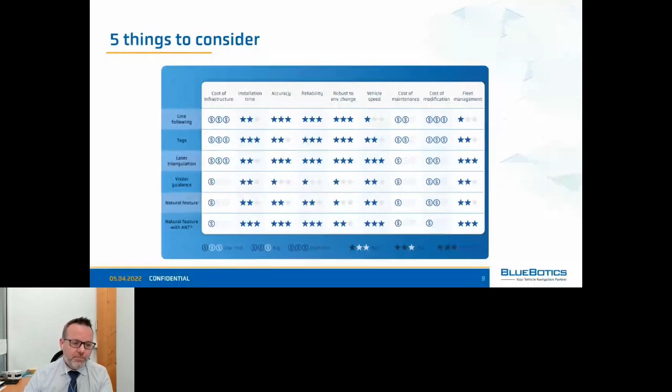Third point, if you decide you want to move from manual forklifts or manual vehicles to automated vehicles, the question is, does your staff have the skills to do this job? Because as I just said, it's not the same producing and selling manual vehicles compared to producing, selling and commissioning automated vehicles. So it's very important to find out if the team dealing with the automated forklifts or automated vehicles has the right skills, the right education, the right experience to deal with this new kind of product.

And point number 4, we should not forget about the battery and charging approach used in a vehicle, because it has a very important impact. Especially in the last years, where we moved from lead batteries to lithium batteries, the ratio between the operation of a vehicle and the time spent charging has dramatically changed. So by choosing the right battery system, and the right charging system, which of course you can discuss with all our partner companies in the group.

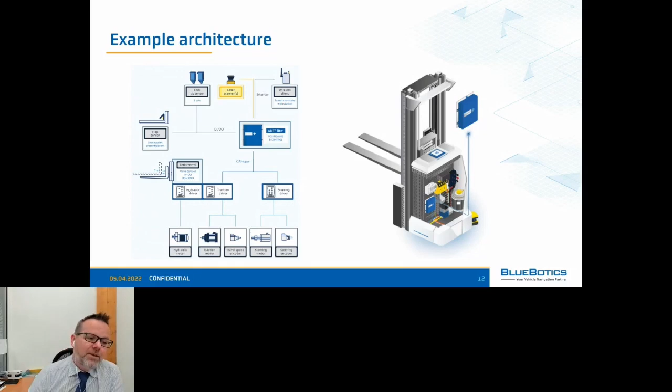This was the part about how to automate. Then we also bring you 3 questions that are common for someone doing automated guided vehicles, automated forklifts or autonomous mobile robots. So point number 1, a question that comes very often is, what do I need if I have more than one vehicle which is automated?

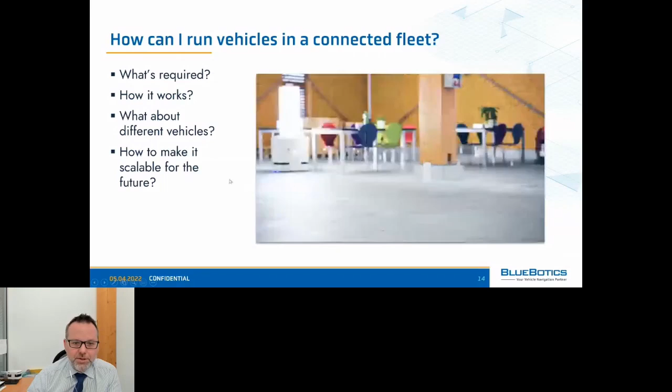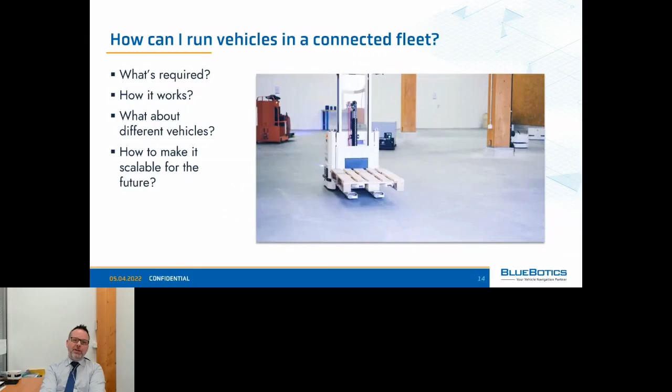So in this case, we talk about a fleet management system. So basically what is required for that, I may just run the video here. It's a little bit bumpy, but it seems it works. So what is required? First of all, if you have more than one vehicle, the vehicles are sharing the different, let's call them streets or ways. So one needs to have a traffic management system that allows to know which vehicle can go and which vehicle has to stop when there is traffic in a certain place.

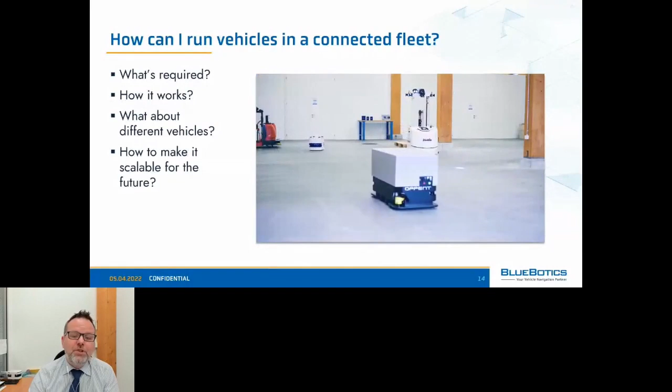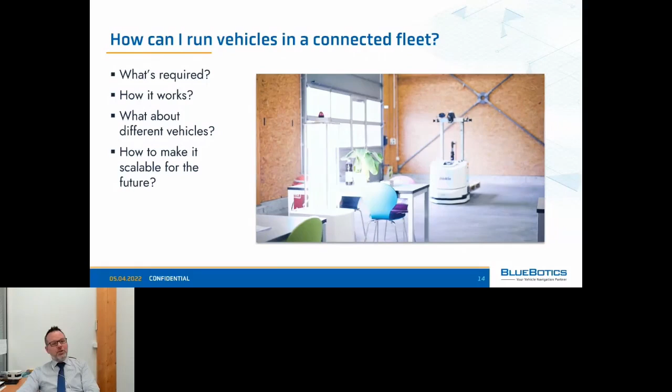A second point, which is fundamental, is that if there is a fleet of vehicles, one should define which vehicle should do which task. So this we call scheduling. These are the 2 most important functionalities that one has in a fleet management system. So I just repeat, on one side is scheduling, which means that one has to decide which job has to be given to which vehicle and when. And the second one is to then coordinate all these vehicles moving around by having a traffic management system.

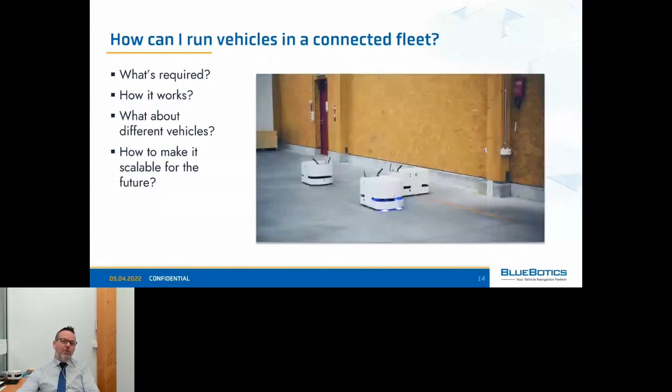How does it work? Well, the idea is rather simple. In this case, it is to have a centralized system that is talking regularly with all these vehicles and knows what the vehicles plan to do, where they plan to go. And with this in mind, the system can then coordinate the different jobs that have to be done and the different routes that the vehicles are traveling.

There is also an emerging question. There are more and more end customers that say most of the time they need more than one vehicle. They need different vehicle types. They may need vehicles to move pallets, but also vehicles to move boxes or cars, etc. So in this case, there is a need that is coming up, which is having different vehicle types or even different vehicle brands working together. And that's a key requirement from the market. There are very few suppliers that can solve this problem. It's rather difficult to have this.

There are installations, for example, at Volkswagen, where you have 3 different vehicle types and 3 different streets, because every vehicle needs its own, because they are not able with the different fleet management systems to share the same space. And of course, this is not ideal in terms of cost of the square meter and cost of the fleet management itself, because you have to install 3 different systems. And that's where we think we can make a difference in the future, because with our system, we can make different types of vehicles and different brands work together.

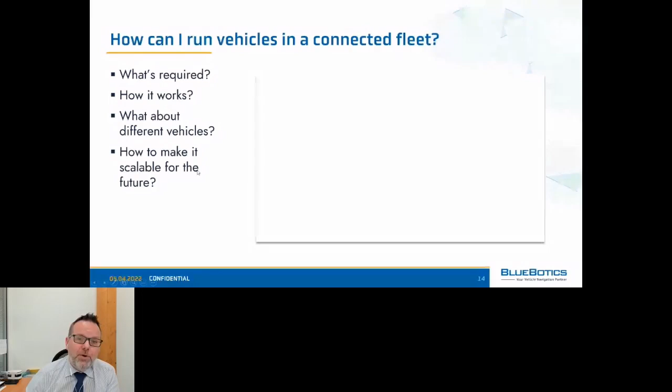A second point that, to be honest, we also underestimated at BlueBotics in the beginning, kind of 10 years ago, is that the vehicles, in order to do their job, need interfaces. On one side to the supervision team that has to know how the system is performing, if there is something to do, if there is maintenance, etc. That's something that is

relatively clear. But the other point is that it's important to have an interface to the business software, as I said before, which could be a warehouse management system, manufacturing execution system, or an ERP. That's what we see here. And there are in reality exceptions. There are systems that are installed that only have this part here because they are only doing very simple tasks that are started by a button or by a simple interface.

But I would say that the most typical installations are really installations where the whole system is integrated to the business software. And basically, an automated vehicle is a kind of arm of the business software that can not only track what's going on, but really start moving things around, like moving pallets, moving goods, semi-assemblies, etc. That's one part of the story, which is very important.

In our case, we have a very clear and simple API, so application programming interface, which is standardized and allows to build up this link between the fleet management that we call ANT server and the business software in a rather simple way. The second point that is very important is that it is quite seldom that a vehicle can work by itself without interacting with anything else in the physical world.

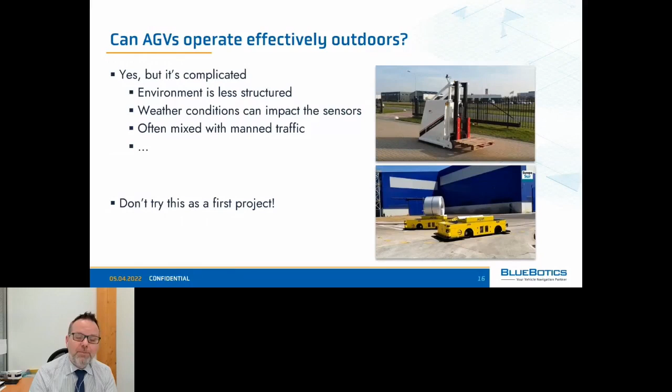Here, I may have a question for Lloyd, because this would be all the part about the technology, why to automate, etc. And now we have examples of customer projects. So should we open the session for questions at this stage, and then go to the examples and open it again later on? Sure. I mean, it's your choice. That can work. No, you are the boss. Okay. We don't have any questions yet coming up in the chat. So maybe go through the projects, and then we can pause in a few minutes. Sure, let's do that then. And then your job, audience, is to invent questions later for the end of the presentation.

Okay, so the idea here is that we would like to share a few projects that we think are relevant with you to give you a better idea of what is an application with automated guided vehicles, automated forklifts, etc. So we start with project number one, which is an automation of production of parts for automotive. This is a project that has been done by our customer F3 Design in the USA. The end customer, so the company automating their processes, is GECOM Corporation USA. As I said before, they are in the automotive market.

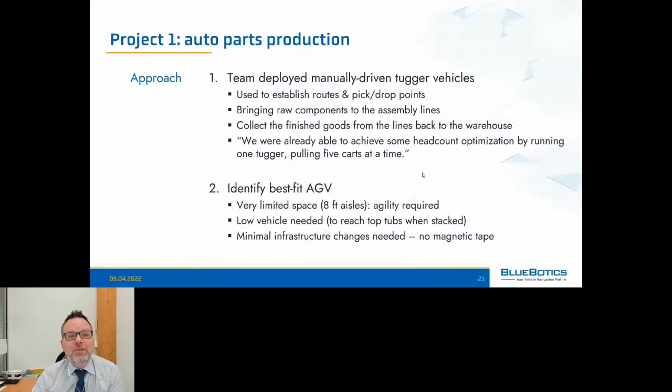In general, also, since it is a building that was already there and an operation that was already working, they wanted to have minimal infrastructure changes in order to use automated guided vehicles. And these 3 different constraints are the main reason for them to choose the F3 Design Nipper vehicle, which is a very compact vehicle. It can move up to 1 ton. And another fundamental point is a vehicle that can turn on the spot.

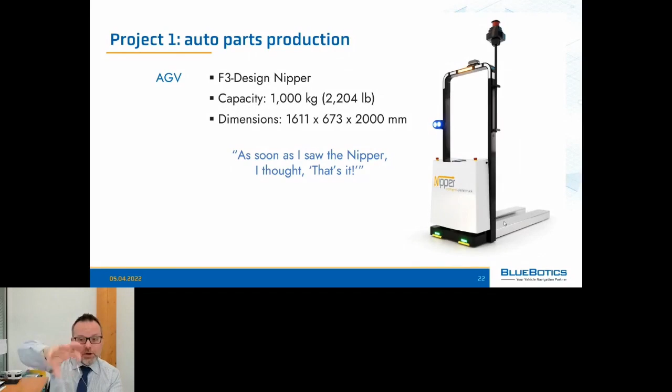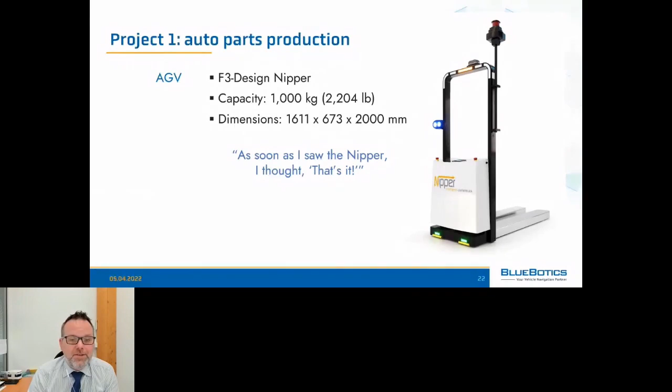So it's a differential drive system. It has basically 2 motors there, and they can really turn on the spot to take as little space as possible. And so the statement of the CEO of the company was that as soon as they saw this vehicle, they said, "Oh, that's clear. That's what we need for this application." In terms of software, as I said quickly before, the BlueBotics ANT server was interfaced with the Ignition SCADA software. They also developed custom-specific interfaces to monitor the operation of the vehicles.

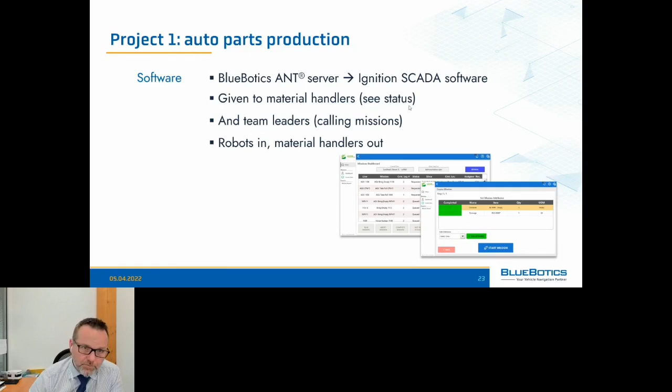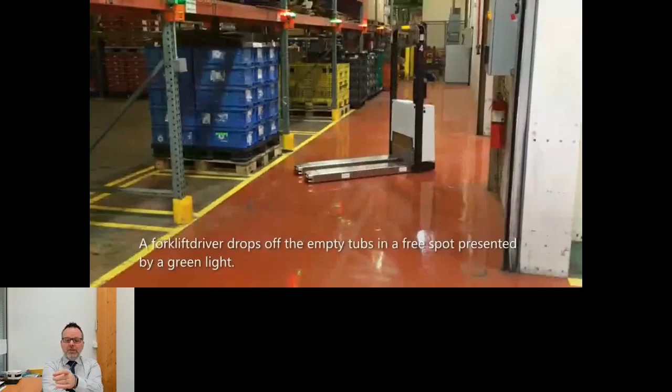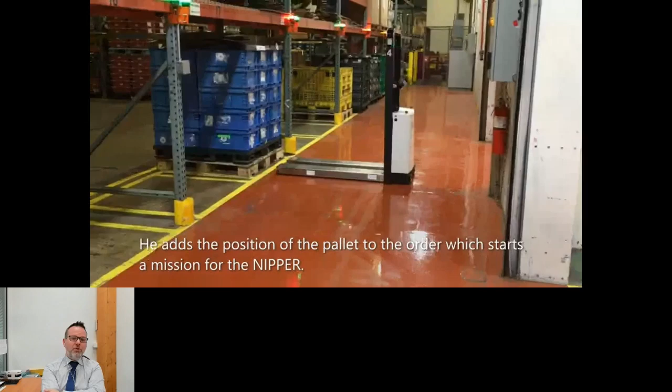Here you can see a video showing a typical movement. You can see this vehicle that can indeed, as I said before, turn on the spot. This is not the smallest hallway they have. They have some that are even smaller, but you see that there is not much room to have larger vehicles. And if you had to do more complex maneuvers compared to the ones they were doing here, it would be difficult to pick up the pallet.

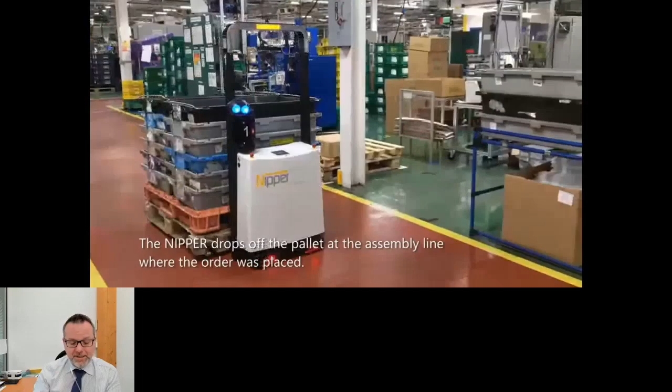As you can see also in the background, there is a lot of stuff everywhere. It's a big job for them to move all this. Not everything was completely automated, so they decided to automate first the processes that needed more movements. And here you can see the vehicle bringing empty boxes to the assembly line. Again, with this turning on the spot, which was fundamental because of the very limited space.

So at the end, they had 5 vehicles doing the job. They had more than 150 positions where they had either to pick up or deliver pallets, and more than 65 assembly lines were automated with this solution. The result is that they could reduce the resources needed to move all this around by about 73%, which resulted in a break-even after 2 years.

And now they are evaluating adding forklift vehicles or another type of vehicle to automate all the processes, which again shows the importance of the point referred to before, that the system must be scalable, because you start with one process and then you want to automate the next one. That was one point. And the other one is that you need to be able to use the Nipper vehicle today and maybe tomorrow another model or even another brand in order to make everything work well and automate all the processes that you want to automate.

So sorry, need some drink.

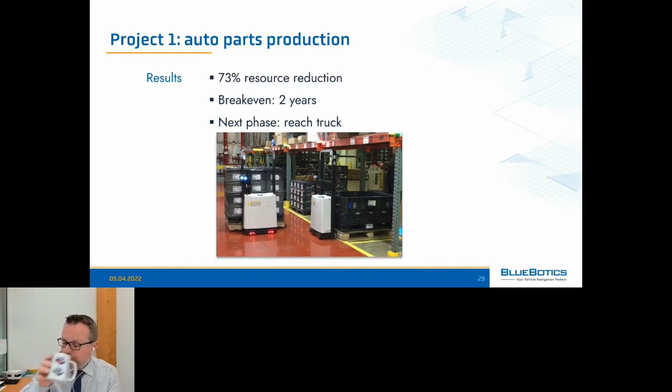The second example we want to show you here is the automation of production of semiconductors. This is a production in Switzerland. It was ABB Semiconductor, but this ABB unit has been sold to Hitachi, so today it's called Hitachi Power Grids. The industry is high-tech semiconductors. The vehicles used there are 14 vehicles called Mini.

This is a bit of an exception because these are vehicles that we provide ourselves for this plant. The software used is BlueBotics ANT, again, as fleet management. And the business software there is a manufacturing execution system from ABB called ABB Ability Manufacturing Operations Management System.

The challenge there is quite an interesting one. Production of semiconductors in Switzerland is basically too expensive, if you do it in the normal way, because the cost of labor is too high. So back in 2000 and when was this? Must have been 16, 17, I don't remember.

We had the first discussion with the team at ABB that was telling us really clearly: this plant in Lenzburg, Switzerland, either we automate or we close it and we offshore this to a place where we have cheaper labor. So the goal, or let's say the challenge, was to increase efficiency to remain competitive in Switzerland in order to keep the production in Switzerland.

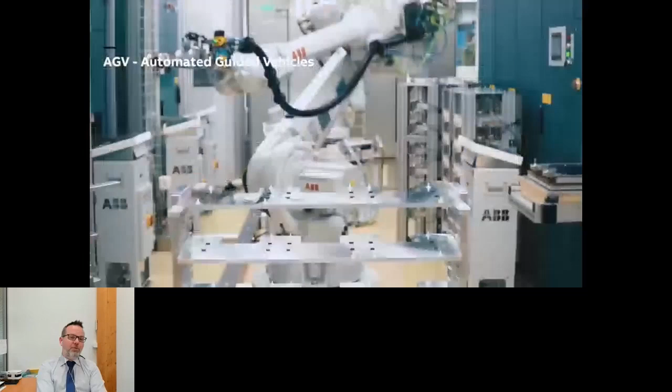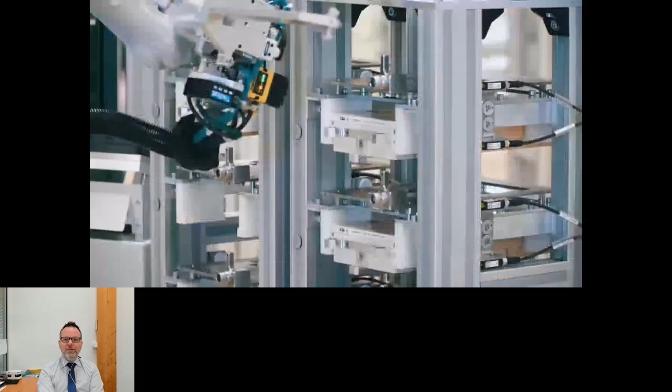So that's indeed a cart full of these semiconductors that are moved from the production to the testing facility. And that's a fully automated testing system that is taking every single semiconductor and testing it fully.

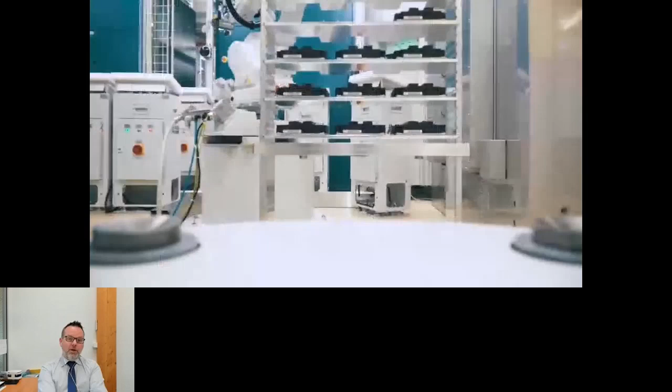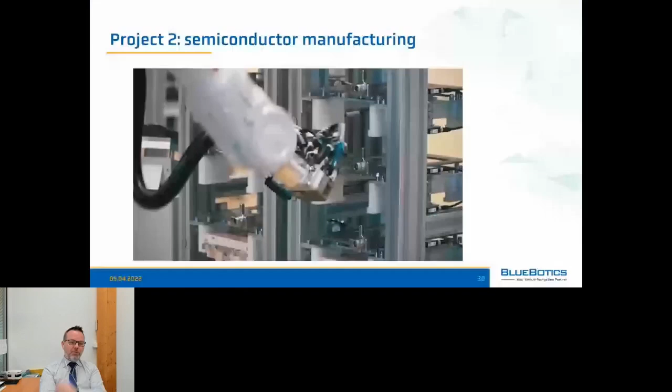The whole project is quite impressive. So their goal was to say, I mean, the plant in Lenzburg, I don't know exactly, but it was probably about 300 employees there, with about 100 employees working indeed in the clean room. So that was also a key constraint, by the way. So clean room ISO 5 standard. And the goal was to dramatically reduce the people that were in the clean room.

The job in the clean room is complicated because you have to dress up for that. The space is limited. It's very expensive. So there was a significant increase in productivity where basically they plan to move from 100 people in the clean room to only 2 to 5 people that will remain in the clean room.

This is, of course, a reduction of jobs on one side, but the alternative was to lose 300 places. So the other 200 that are working around the plant, they will stay in Switzerland with a fully automated production plant that is making the difference and allows ABB, or let's say Hitachi, to keep this production in our country.

The quality also was improved by having everything automated, because you can better handle the quality and also the quality control. And this project won several awards, so factory of the year, etc., for the implementation of this automation system.

The last example we want to share with you, it is a completely different field. It is still automotive, let's say, compared to the first one, but it's not producing automotive components for the cars. It is about producing tires. So the company is Michelin. The plant is in Cuneo, Italy, a very good place where you can have very good wine and very good food. And as I said, industry is tire production.

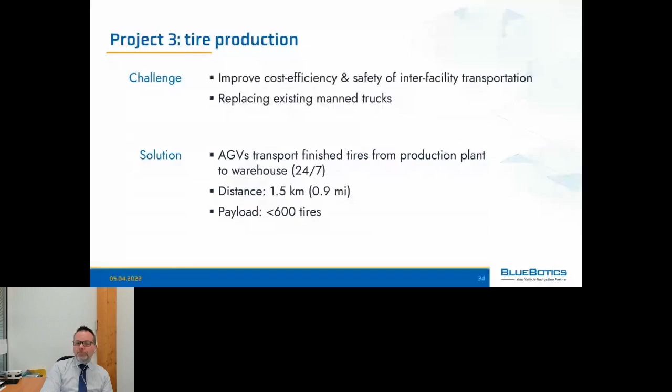Without going into details, this gives you an overview about the project. Of course, this was a huge improvement in efficiency. Also, a very important cost reduction. Improved safety, because all the automated processes guarantee safety. And also, from an ecological point of view, it was extremely interesting, because it represents a reduction of 50 tons of CO2 per year. Voila, that was the presentation of BlueBotics.